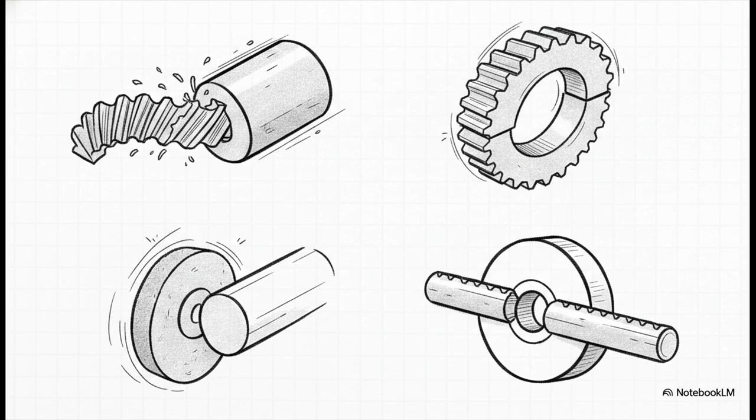So how do you actually achieve that kind of mind-boggling precision? Well, it all starts with the physical act of cutting metal. And here's something that might surprise you. These so-called traditional methods are actually a hotbed of really high-tech innovation. You've got these workhorses of the industry, hobbing, grinding, and broaching. For decades, they've been the absolute backbone for making gears on a massive scale. But, and this is important, traditional definitely doesn't mean stagnant. Just look at a process like gear skiving.

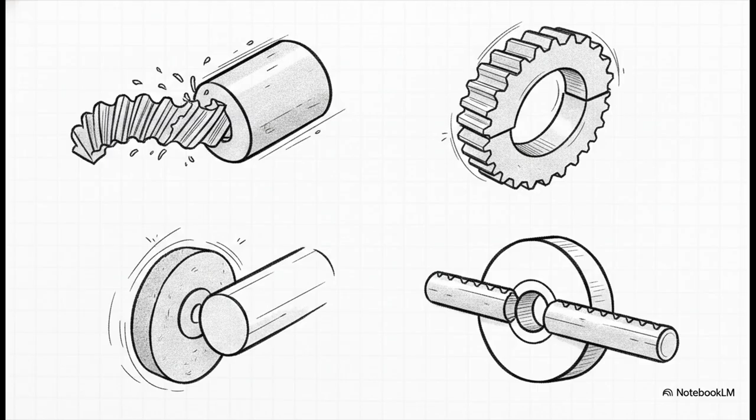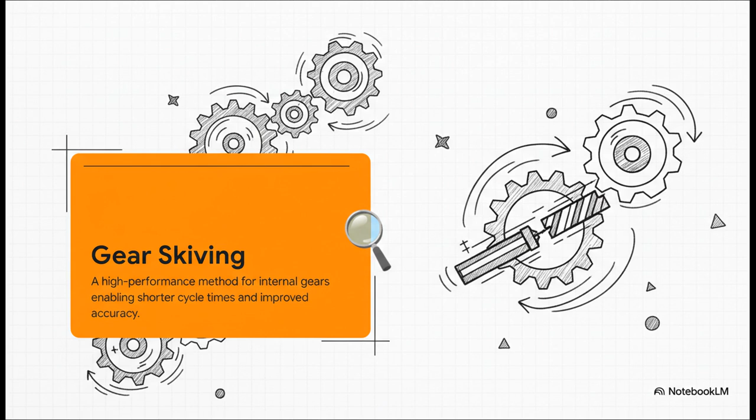Okay, let's zoom in on gear skiving for a second. Now this is super cool. What's so amazing about this method is how it combines the cutting and shaping all into one fluid, super high-speed process. It is insanely efficient and incredibly precise, especially when you're making those really complex internal gears.

But of course, making it work is a huge engineering challenge. You have to perfectly calculate these incredibly complex, high-speed movements to make sure the cutting tool and the gear never ever collide. And at the same time, you're dealing with intense wear and tear on the tool and making sure the lubrication is just right. That's like a high-stakes mechanical ballet, where one tiny misstep means the whole performance is ruined.

And the payoff for getting this right, it's huge. Just look at this stat from research by Kempchatna, Stefanova, and Klochko. By optimizing these cutting processes, you can slash your labor and material costs by a factor of 3 to 4. We're talking about massive gains in efficiency.

All right, so we've got the overall shape down pat, but you know what? That's really only half the story. The next quest for perfection happens on a totally different scale, right on the surface, down at the microscopic level. Just look at the difference here. On the left, you've got a pretty standard surface finish. See those tiny peaks and valleys? They cause friction, noise, and they make things wear out.

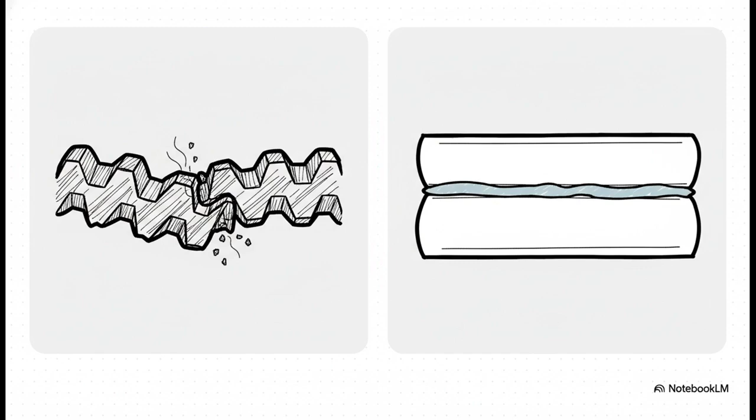But then you look to the right. That perfectly optimized surface, it's a complete game changer. It allows a thin film of oil to sit perfectly, which means quieter operation, a much longer life, and way better efficiency. So the big question is, how do you get that beautiful mirror-smooth surface?

Well, one really slick new answer is a process called stream finishing. The best way to think about it is like a super-powered, high-tech pressure washer. But instead of water, it's using this really fine abrasive material. The result?

As research shows, you get this incredibly smooth surface without any harsh chemicals, creating a perfect texture that holds on to lubricant and just dramatically cuts down on wear.

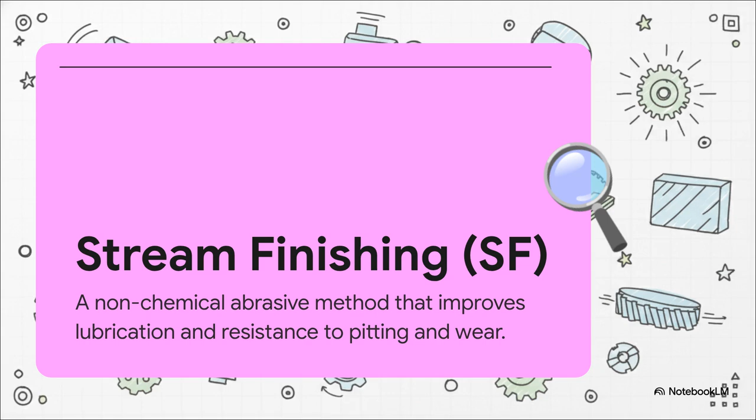Okay, now we're going to pivot. We've been talking a lot about the physical world, cutting and polishing metal, but the biggest revolution, the one that's really changing the game, is happening in the digital world. This is where data and AI are solving problems that are basically invisible to the human eye.

And one of the biggest bad guys in this whole high-precision process is something totally invisible, something we're all familiar with: heat. See, when you're working at the scale of microns, that's millionths of a meter, even a tiny shift in temperature that you would never notice can cause a catastrophic error. So here's what happens. Picture a huge grinding machine. As it runs, the spindle gets hot, right?

Simple enough. But that heat causes the entire massive steel frame of the machine to expand. Just a tiny, tiny bit. But at this scale, tiny is everything. That microscopic distortion is enough to throw off the whole process and make the final gear totally inaccurate.

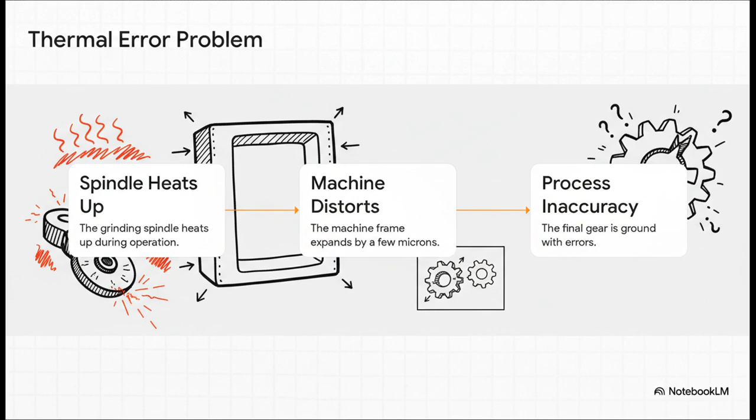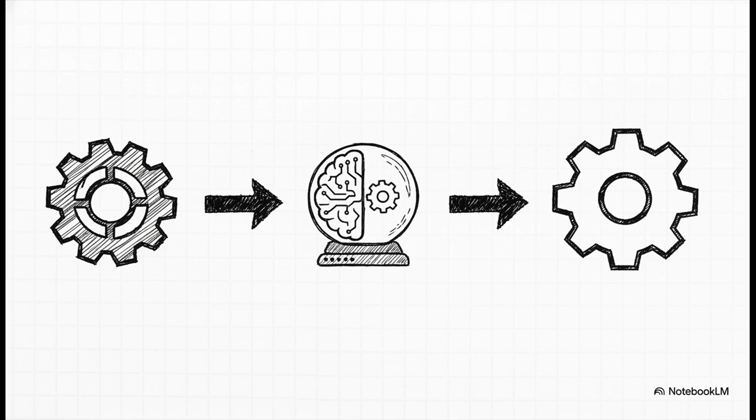So what do you do? How on earth can you compensate for something like that? You can't just react to it; by then the error is already baked in. The only way to solve it is to predict it before it ever happens. And this is where things get truly brilliant.

Researchers are now using advanced machine learning models, specifically something called a long short-term memory network, or LSTM. The simplest way to think about it is as an AI that has a memory. It learns how the machine behaves over time, so by watching the temperature, it can predict in real time exactly how the machine frame is about to change.

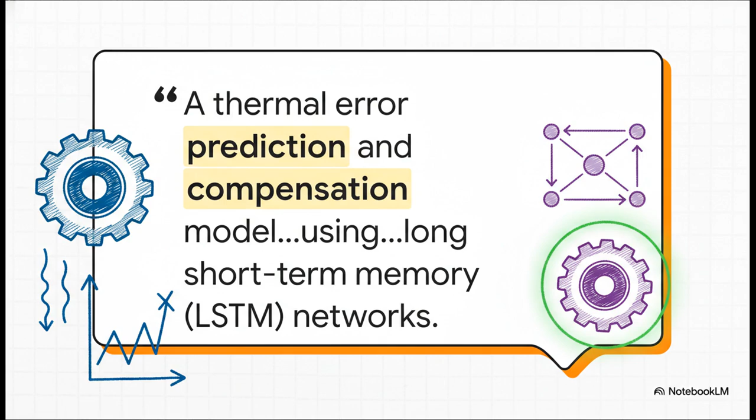Then it tells the machine to adjust for that error before it happens. It's literally correcting for a problem that doesn't exist yet. How cool is that? And for our last stop, let's look over the horizon.

Let's talk about a technology that could change all the rules: additive manufacturing. You probably know it better as 3D printing. So this table kind of breaks down where we are right now. On one hand, you've got your traditional methods. They're still the undisputed champs for mass-producing incredibly strong gears.

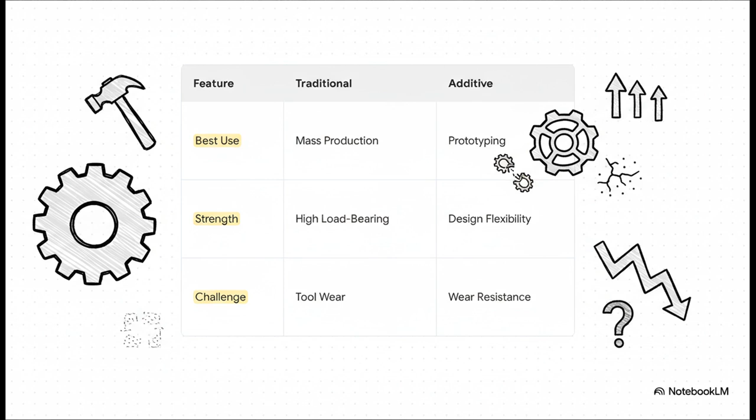On the other hand, you have 3D printing, which gives you unbelievable design freedom. It's perfect for prototypes or really custom, low-volume parts. But as the research points out, it's not perfect yet. 3D printed metal gears can have issues with wear resistance, and tiny little problems in the process, like the metal powder getting degraded, can mess up the final accuracy. So the potential is absolutely massive, but we're still on the learning curve.

So after all that, what's the big takeaway? I think it's this. A modern gear is so much more than just a piece of metal. It's like a symphony where old-school craftsmanship, material science, and cutting-edge data science are all playing together in perfect harmony.

Just think about the journey we just took. We saw how even the oldest cutting techniques are constantly getting smarter. We saw surfaces being polished to near perfection. We saw AI literally predicting the future to cancel out invisible errors, and we even took a peek at what's coming next with 3D printing.

And that really brings us to the heart of it all. The quest for the perfect gear isn't just a mechanical process anymore. It's a computational one. It's a data problem. Every single rotation is calculated, every potential flaw is corrected in real time, and every surface is perfected to a level that was basically science fiction just a generation ago.

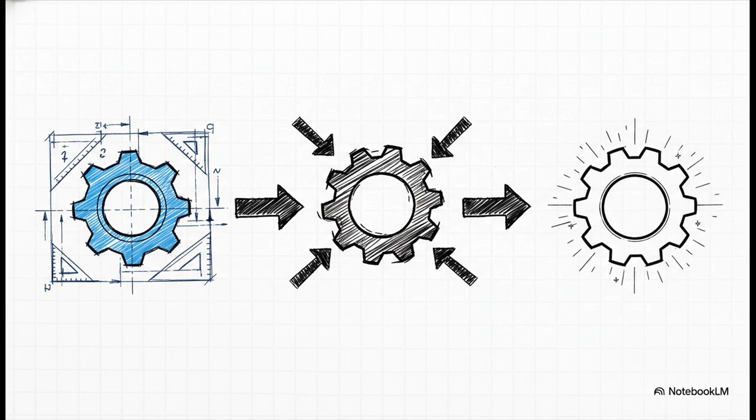So I'll leave you with this to chew on. In a world where a piece of software is shaping a physical object in real time, where does the machine actually end and where does the data begin? It's a wild thought, and that line between the physical and the digital, it's getting blurrier every single day.